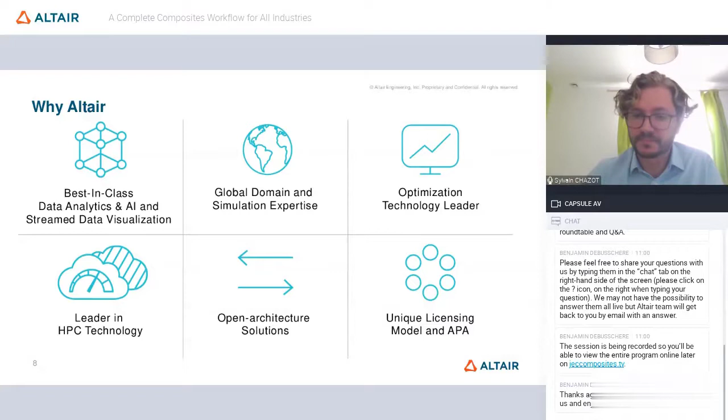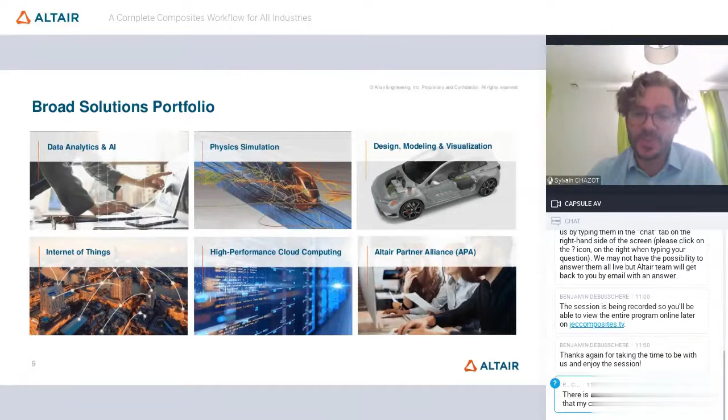Our solutions portfolio is broad and vast at the moment. We offer things from the Internet of Things to data analytics, to design and visualization. Today we will focus on physics simulation dedicated for composite analysis. For this, we cover a broad range of composite solutions, from advanced material modeling to composite design certification. We offer a full solution, and that will be detailed during the presentation of our VP just after my talk, to show you how we can help you be more efficient in composite design and composite simulation.

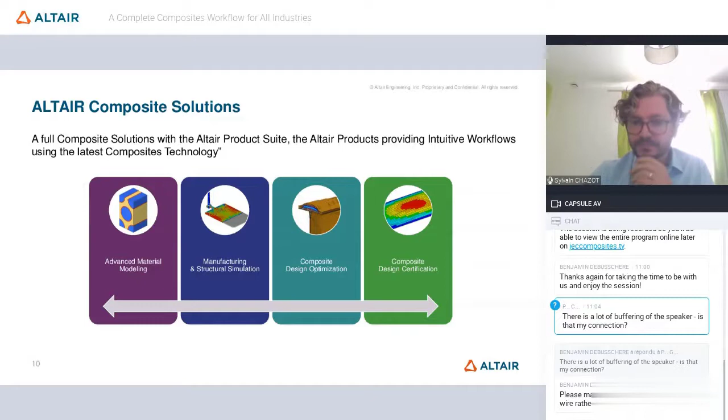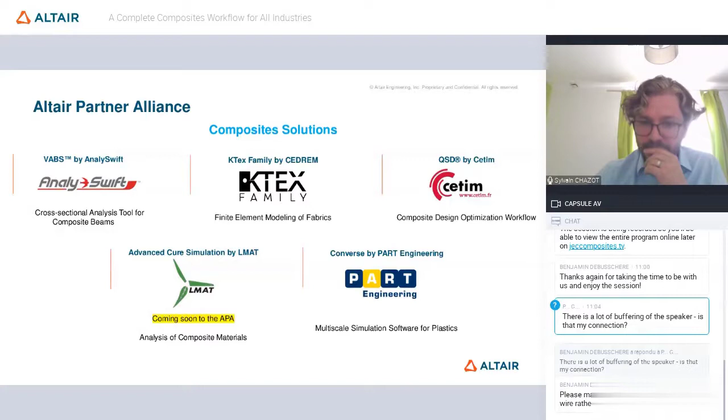Jeff Wollschlager has a Bachelor of Science in Civil Engineering with a specialization in structures from Purdue University. He then received his Master of Science in Mechanical Engineering from Washington University in 2002. He worked for Boeing doing research specific to composite activities, and he joined Altair in 2005. Now Jeff is currently our VP of Composite Technology at Altair Engineering, helping industry customers implement multi-scale material modeling, design optimization, and design certification technology into current and future composite design projects. Jeff is also an affiliate associate professor at the University of Washington, teaching composite design and additive manufacturing. So please welcome Jeff and enjoy the presentation.

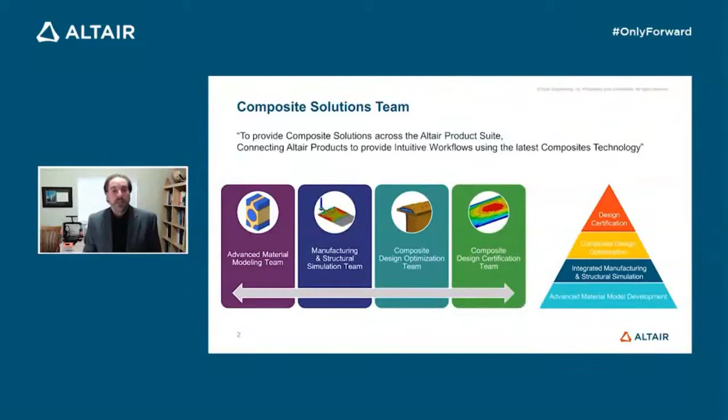So let's talk a little bit about each of these blocks in slightly more detail. In the advanced material model development block, it's really all about transitioning from a homogeneous isotropic world to a heterogeneous anisotropic world, and becoming as comfortable with heterogeneous anisotropic material models as we are with homogeneous isotropic material models. We're focusing on three main product forms right now.

In the continuous reinforced product world, mostly on unidirectional and woven product forms. Within those two product forms, the unique capability is the ability to bridge the scales from the homogeneous ply level to the constituent fiber and matrix level, and to do that computationally efficiently, obtaining results at the constituent fiber and matrix level such that we can get significantly more accurate material models.

Same thing in the discontinuous reinforced product world, which focuses on the reinforced injection molded material world, where we're describing the heterogeneous anisotropic nature of these materials, characterizing that nature, and accurately and computationally efficiently developing material models to describe all of that for you.

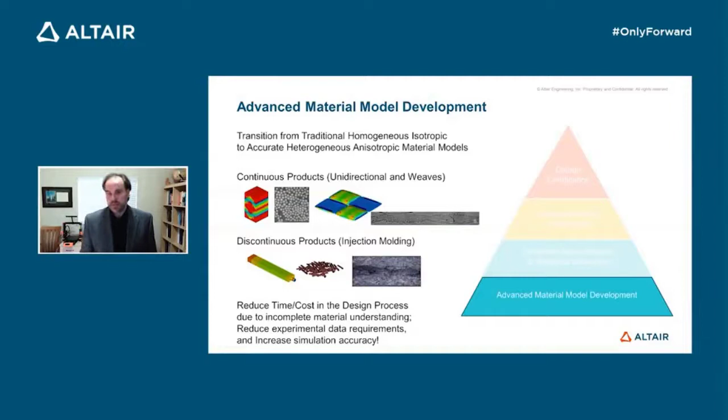The principal product we're using inside the advanced material model development block is what we call Altair Multiscale Designer. What's really unique about this product is that it allows the exact same material models to be used within all commercial solvers, implicit and explicit solvers included. And of course, it's very tightly integrated into our own solvers, OptiStruct and Radioss.

But the exact same material models are also available in other commercially available commercial solvers out there. It is indeed exactly the same material model and exactly the same code. We are using that through the user material capabilities of all of the codes, which is quite a nice thing to be able to do.

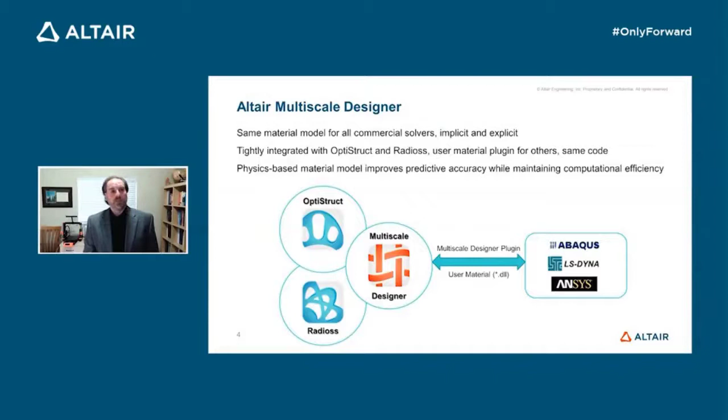When we're talking about integrated manufacturing and structural simulation, again, it's all about being able to efficiently build these structural simulation models while we're bringing information from the manufacturing simulation into that structural simulation in order to improve our predictive accuracy of these structural simulation models.

Three main areas that we're focused on. In the area of traditional or automated layup and infusion methods, we're working on integrating draping simulations for obtaining fiber orientations and/or residuals into the structural simulation very quickly and efficiently.

In the injection molding world, mostly the reinforced injection molding world, but also unreinforced injection molding, we're working on bringing the fiber orientations and the residuals, whether that be thermal gradients, and even using those thermal gradients to understand warpage and residual stresses and strains into the structural simulation world.

So that we can improve the accuracy of those structural simulation models. And the third area we're working on is filament winding, quite a bit of composite pressure vessels, or CPVs, where we're using filament or winding simulation software, which again is providing us fiber orientations and/or residuals of various natures that we can bring into the structural simulation world and apply those to improve the accuracy of those structural simulation models.

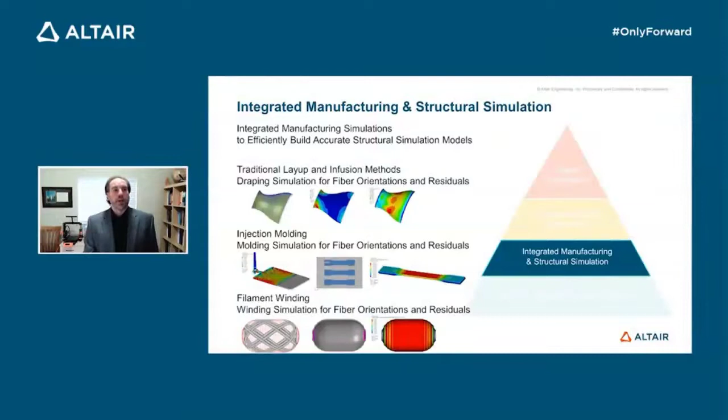While we're improving the accuracy, we want to be able to do that efficiently. You're going to notice that quite a bit of what we do is about efficiency and doing things as quickly as possible. A good example of a complete workflow in the integrated manufacturing and structural simulation world is the Altair injection molding solution workflow.

It involves three main pieces. We have just released Inspire Mold, which is a fantastic molding simulation product. It allows you to do your fill, your pack, and your cool simulations. In addition to all that, you can get your fiber orientations after you do a filling simulation.

Multiscale Designer is used in concert with the molding simulation to develop a heterogeneous anisotropic material model for that particular reinforced injection molded material. And then we bring both of those informations together into the pre and post processing world, which is HyperMesh and HyperView.

HyperMesh, where we build the structural simulation model. HyperView, where we're post processing that particular structural simulation model. And of course, we're using OptiStruct in order to perform the solution, whether it's a solution of a warping simulation or whether it's a strength simulation, including warp residuals in that strength simulation for ultimate load carrying capability.

So it is quite an advanced, wholly contained solution. I think what's really unique about this particular solution workflow is that it's wholly contained from all the way from the beginning to the end within the Altair product suite. Really solving the interoperability problem that you might have to go through if you were going to a la carte the pieces of this together from other commercially available offerings.

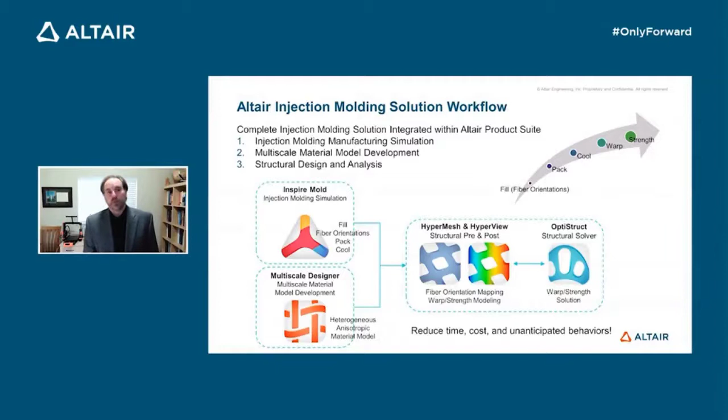Okay, going into composite design optimization. Using traditional capabilities in the concept design optimization world, namely topology optimization, which is going to give us, in the composite design optimization world, our part shape. We're using that exact same technology to really tell us what should the part shape be.

But we need to go a little further with composites. So once we know that we have a certain part shape, we can make up that part shape with any number of composite plies and any number of orientations and thicknesses that we need. And so we've extended our optimization capabilities into two primary technologies.

The first one in the composite concept design optimization world, which is called composite free size optimization. That technology is really focused on trying to describe what are the most efficient ply shapes. You're going to see here I have a slide that shows that we're actually synthesizing, just like topology is synthesizing a structure, we're actually synthesizing ply shapes that make up that structure with that particular concept design optimization technology.

Once you've kind of interpreted your concepts, then we can get into the detailed composite design optimization phase. And there we're talking about a technology called composite size and shape optimization. It's equivalent to the size and shape optimization. We just put the word composite on front because we're talking about sizing ply shapes now.

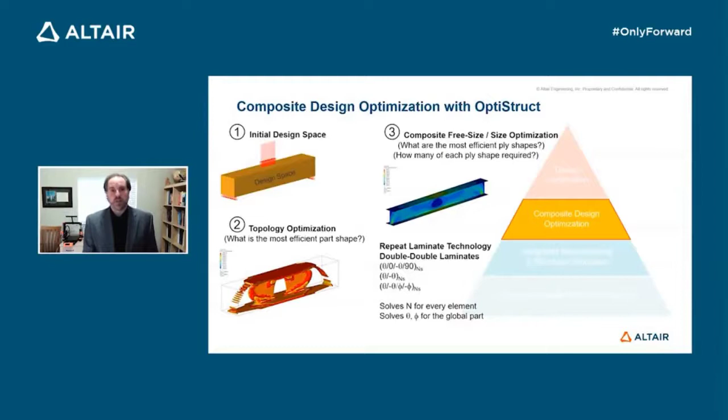Hopefully I can show you the image here where the real difference, the unique aspect of these composite design and optimization technologies we're bringing to the commercial world, is the ability to synthesize ply shapes you might not have intuitively thought to make before, but which are absolutely valid and can be made. You can see some examples here that might not be super intuitive, but are reasonable and practical to manufacture.

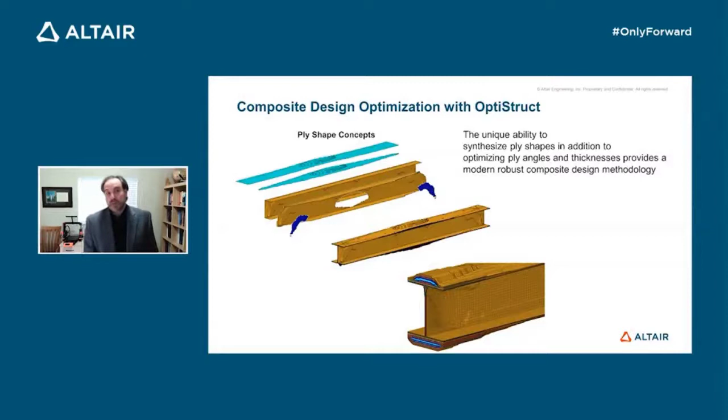So while we're synthesizing these ply shapes, we're also optimizing the ply angles and the ply thicknesses. We're providing a modern, robust composite design methodology that is quite different from traditional design methodologies in the world of composites.

Last but not least, in our development block of design certification, it's all about integrating composite stress toolboxes into a finite element architecture world. That's always been the outstanding item of these stress toolboxes, which exist in numbers across many companies—really interoperating with the finite element architecture or information. We have a unique opportunity at Altair since we acquired ESAComp, a fantastic composite stress toolbox that came out of ESA in Europe, the European Space Agency.

What we're working on is providing an integrated version of that technology inside the HyperWorks framework, really solving the interoperability problem—the exchanging of information between your finite element models and your traditional composite sizing or certification calculations—in order to reduce the pain point there. So that's all about the FEA Integrated Stress Toolbox.

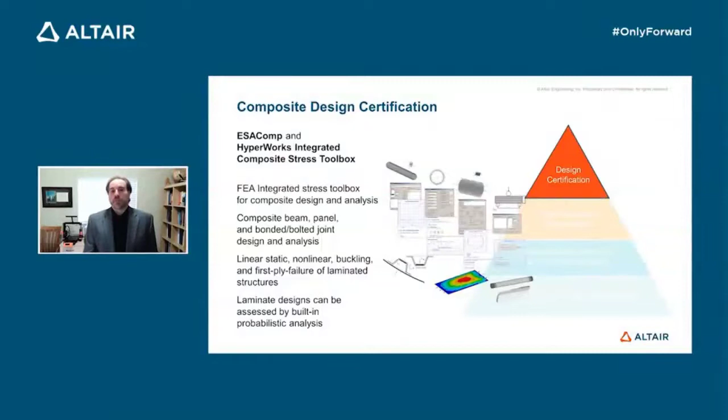It will provide capabilities for composite beams, panels, bonded and bolted joints, for both design and analysis. It can handle linear static, nonlinear, buckling, first ply failure, and even progressive failure of laminated structures. It's quite exciting to see this technology come in.

By and large, those are the four main areas we're focused on in development. Hopefully this gives you some insight into the vision and the roadmap and where we're going. The team was put together about a year and a half ago, and you should start seeing the fruits of our labor coming in with version 2020 and beyond. I hope you enjoy it.

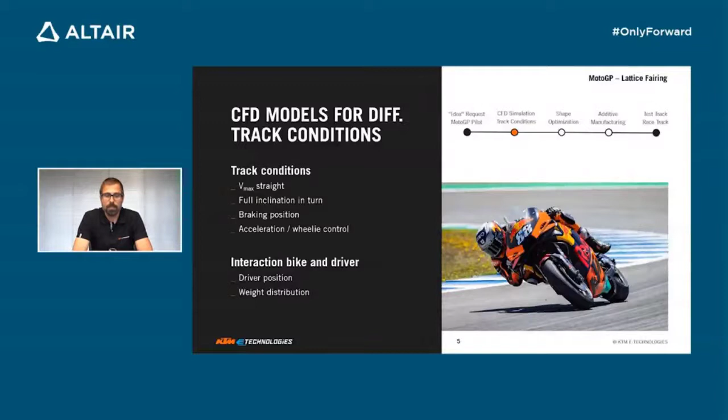We have to define whether it's a global problem, where the whole fairing has to be changed, or some kind of local problem where additional aerodynamic elements, for example the G-wing, is a possible solution.

We also have to define appropriate targets for our adjoint optimization. Either we want to maximize the downforce or minimize the drag, or whether we want to influence the flow around the driver or the force acting on the driver.

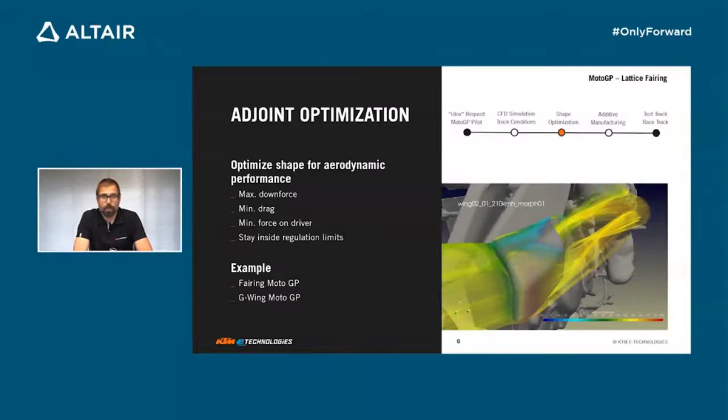In order to be quick on a test track, we need appropriate manufacturing techniques. We think that additive manufacturing in combination with simulation is a very good tool to do so.

Here we need especially simulation topics to define the back structure below our aerodynamic surfaces, to give the part enough stiffness that it will not deform during the ride.

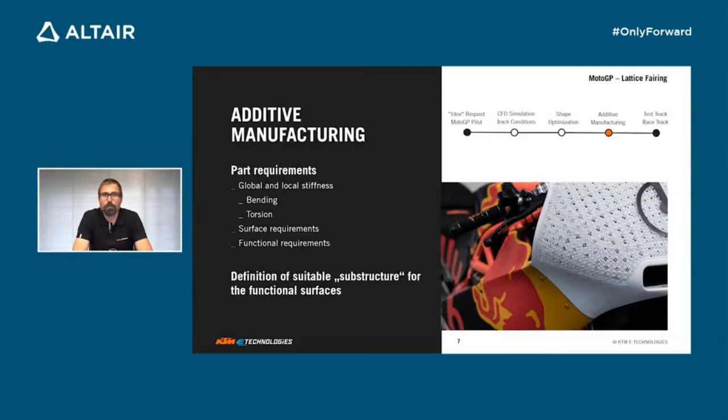As you can see on the slide, we developed lattice structures that differ in the lattice itself, the density of the mesh, and also the size of the structure.

To summarize this whole process, with the combination of Altair simulation tools and appropriate manufacturing techniques, we are able to really quickly get from an idea of improvement to a part that can be tested on the track.

We can tailor it to the needs of the driver, and we can even make different parts for every single driver without major additional effort.

Compared to conventional CFRP solutions, with this approach we do not need molds, and we also do not need the expensive CFRP material. So the whole process is not just faster than CFRP, but also a lot cheaper.

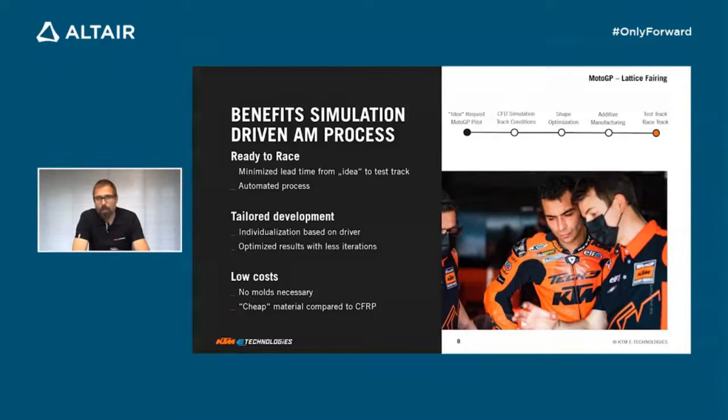The next case study I want to present is the development of a vehicle frame within a new urban concept. This new urban concept, or the platform, is called Emotion.

Emotion is a research project where the goal is to develop a cost-effective, energy-efficient and comfortable new light electric vehicle platform, especially tailored for young and older generations, where the platform provides the possibility to place vehicles in different categories, for example the L1 and L3 category.

We have three different areas of interest, where the first one focuses on lightweight frame design and packaging. This is what I also want to focus on in this speech. The other two are electric efficient powertrain and an innovative user-centered HMI.

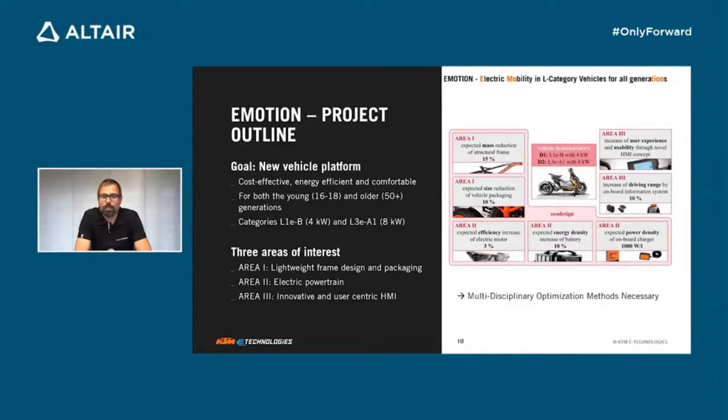For example, the mass is influenced by the battery size. The battery size influences the range. The structure is influenced, etc. Therefore, multidisciplinary optimization methods are necessary in order to find a global optimum.

To do so, we went through different steps. First of all, we wanted to get realistic load data for this new vehicle concept. Therefore, we set up a load data acquisition vehicle, which is somehow representative, by means of stiffness and weight, of the vehicle platform we want to develop.

We then equipped this vehicle or its components with measurement equipment, with strain gauges for example, calibrated on a test bench, and then went riding with it on a test track and also in real scenarios, as you can see on the slide.

We used simulation technique here mainly to define positions for the measurement sensors to be sensitive, for example, to a single force, so that we can divide the different forces in the right way, to then come out with load collectives that we can use for the further development of the bike and also for further test bench investigations.

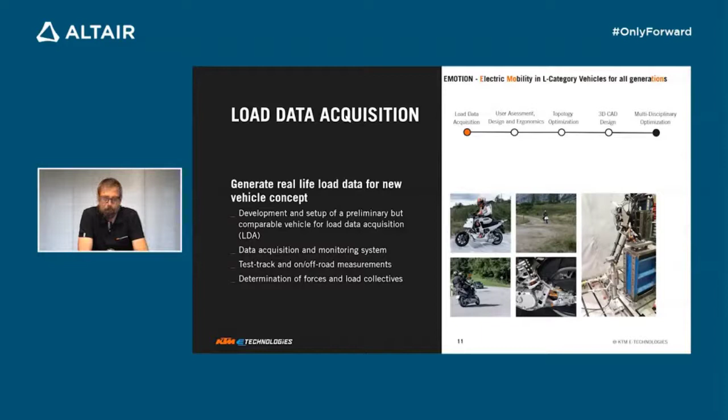In the next step, we try to include in our optimization some kind of implicit know-how, meaning we want to include the user at a very early stage in the development. We thought ergonomics was a very important input here, which is why we set up an ergonomic bike to collect impressions from users.

We combined this investigation with packaging studies to place the main components like the battery and motor, and also with first simulations regarding the topology of the frame in order to identify load paths.

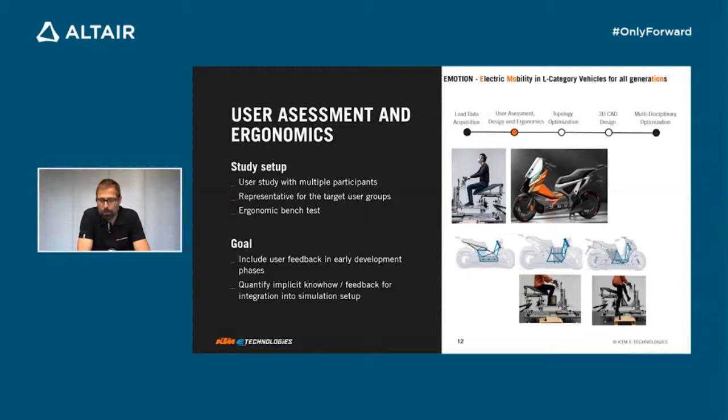And at the end, we tried to collect all input with some kind of parameters or formulas to be included in the optimization method.

On this slide you can see some results from the topology optimization. We used this simulation technique to play with different manufacturing techniques, masses, stiffnesses, materials, etc. There's a typical graphic coming out of it on top and on the bottom left side, which is a kind of density distribution.

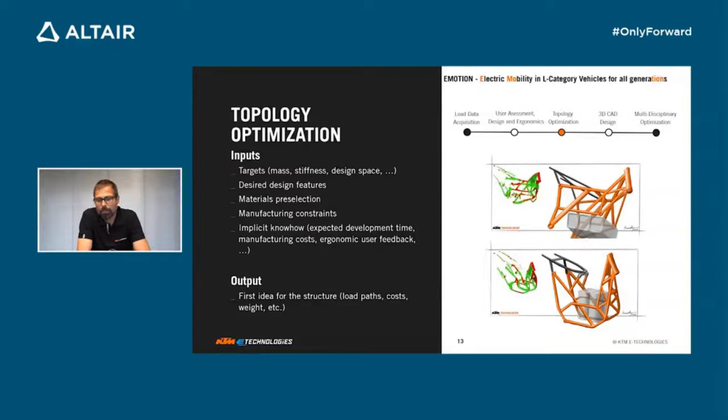We derived a technical sketch from this in order to interpret those solutions with a possible structure. You can also see different battery concepts that influence the structure here. So the main output is to get a first idea of how this looks.

In the next step, we set up step by step a 3D CAD model for the main structure, where we also used simulation techniques for the development and detailing of this structure.

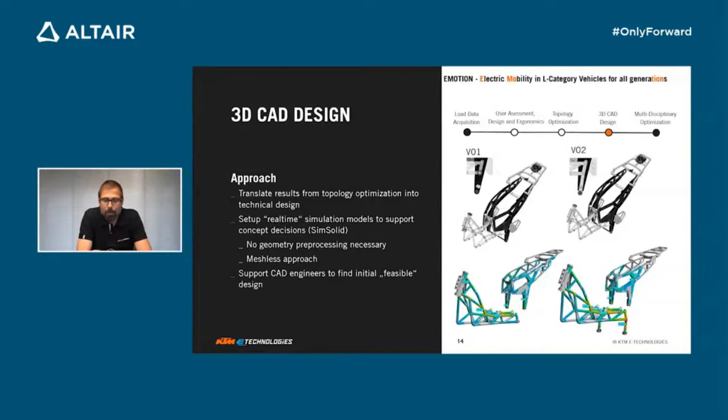We set up a SimSolid model, which is a meshless simulation technique that is more or less real time, so we were able to support the CAD engineers with important decisions. On the bottom you can see the final CAD, or the simulation of the final CAD, which is then the starting point.

For further optimization, this multidisciplinary optimization, we parameterized the structure - thicknesses, wall thicknesses, positions of the pipes, materials, etc. - and combined them with economical targets like costs and CO2 footprint to find a global optimum for our structure.

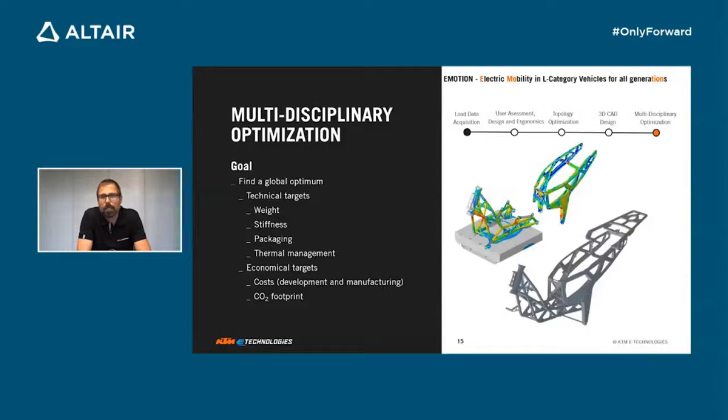The project Emotion is going on at the moment. The development is also ongoing, and the first prototypes will be set up by the end of this year.

The last thing I want to focus on is a series part that we try to rethink using simulation techniques - what we call a new generation footrest. We took a standard off-the-shelf KTM footrest from the KTM Super Duke 1290R. You can see the bike on top and the footrest and all its parts below.

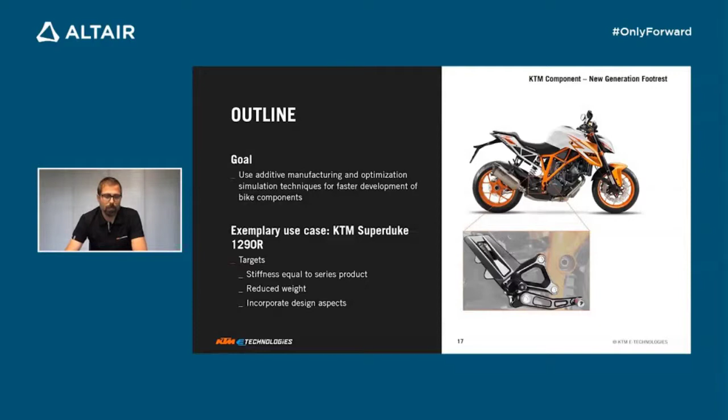We wanted to use simulation techniques to rethink this structure, where we want to keep the stiffness equivalent as it is right now, reduce weight, and also incorporate some new design aspects, or new design ideas.

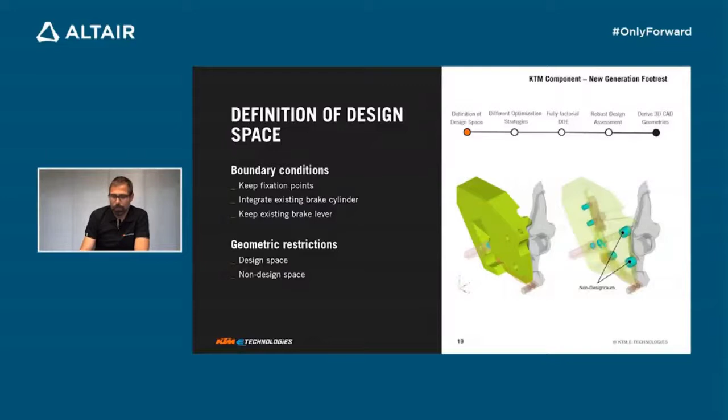In this case study, I want to focus more in depth on the simulation approach. You can see two different pictures here. On the left hand side you can see the design space we defined - we want to develop mainly the footrest main plate. On the right hand side you can see some non-design spaces where we want to keep the fixation points as they are, and also integrate the existing components into the optimization.

We went through 3 steps here, comparing three different complex optimization strategies. The first strategy is a standard optimization with nominal values, which results in a first design proposal. The next step includes scattering and defines a design of experiments, where we get different designs with scattered loads or scattered material parameters.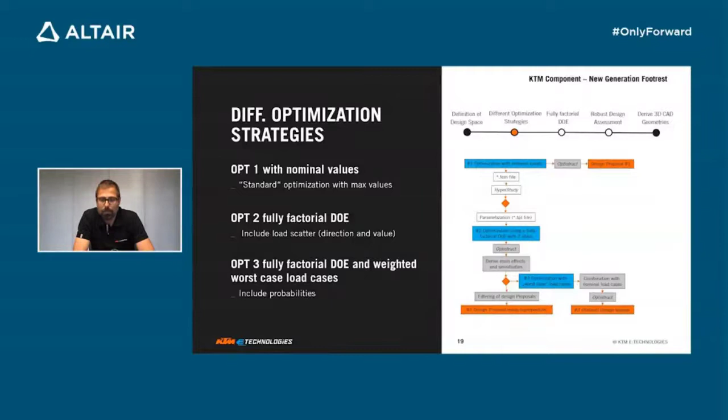We combined all this output to generate a second possible design. Then in the last step, we focused on the worst case load cases and also included probabilistic methods to finally come up with a robust design proposal.

In this slide you can see some results of the full factorial design of experiment. You can see on top that if we vary the force, materials, and other things, we come up with different load paths.

So there is a need to cluster those load paths, which we did here by using several colors. You can also see here on the bottom that we did some sensitivity analysis to define the important parameters, where lines showing a very horizontal line have no real influence on the properties of the part, and those with a steep or vertical line from minimum to maximum have a very intense influence on some property of the structure.

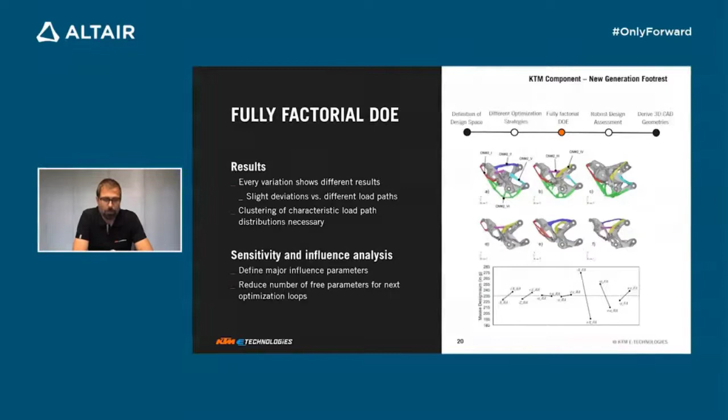Finally, here's an overview of the robust design assessment. You can see that although a footrest is a rather simple part, there is a lot of deviation in forces, for example from the position where the foot is set on. It depends on the shoe size, the driving condition, and the ability of the driver. So it's not that easy to reduce the load cases to a single force.

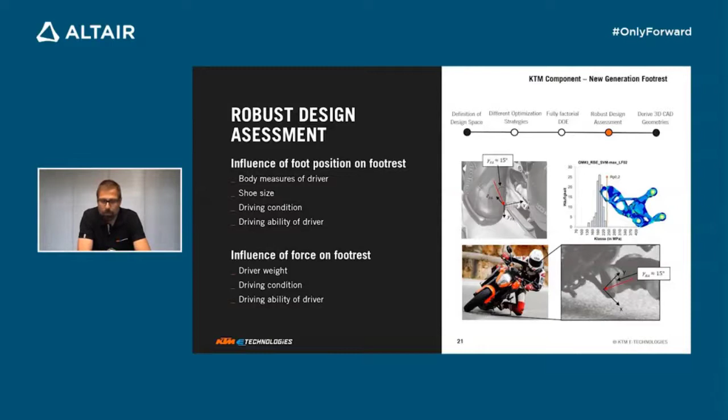So we included these different load positions, these different load directions, and combined it with probability. You can see on the top right an expression for this leading to the last optimization step to get a robust design. You can see the result on the top right hand side, where on the top left hand side there is the series part.

We now have two different ways of generating 3D data out of it. There is the direct 3D generation, where we can use surface data directly by post-processing in HyperMesh, or we can use faceted data, then go through a smoothing algorithm or geometric wrap to come to CAD data. Or we go an indirect way, exporting the faceted data into a CAD program like CATIA, and then set up a generic parametric CAD model, where we can simplify the structure and include other inputs.

On the top picture on the right side, and the bottom picture on the right side, there is an interpretation from our design company Kiska based on the results of the topology optimization.

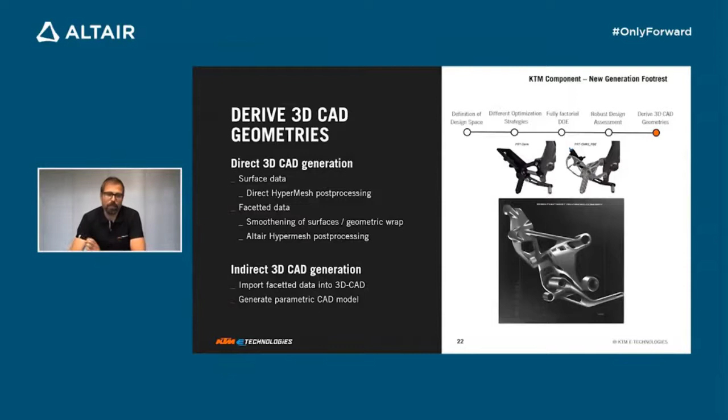To conclude my talk, I hope I gave you a short insight into different simulation topics and different ways we're using the Altair simulation portfolio. For us at KTM Technologies, it's very important to have fast and reliable simulation processes, and we try to use them at a very early stage in development to overcome uncertainties and already use facts for the decision of the way forward. What we also include very early is not only technical issues, but also costs, engineering complexity, and implicit user know-how.

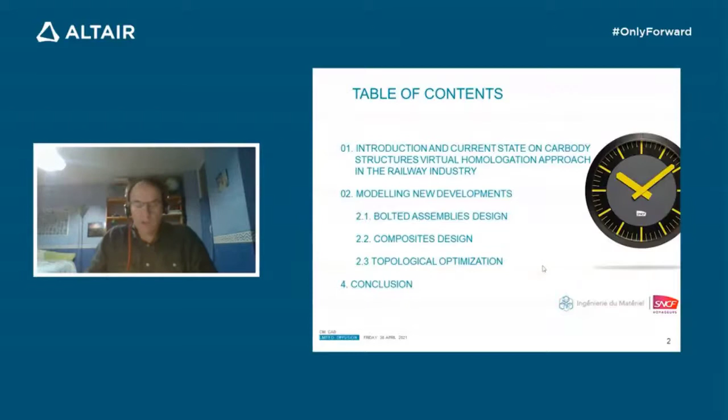We work in the engineering center of the rolling stock of the SNCF. We are in charge of the acquisition and modification of French trains. This takes us to often use numerical simulation, as it can be applied for maintenance support and for actions in research projects, European and national.

For the static, fatigue, and passive safety analysis, we have a good experience and proven methods with the use of European standards: EN 12663 for static and fatigue, and EN 15227 for passive safety.

In our static and fatigue analysis, we start from a CAD model using CATIA software. After, we prepare our simulation model under Hypermesh and calculate the reference loading cases. We have recently changed over from ANSYS to OptiStruct software in order to simplify and optimize our licenses and to limit the tools within the HyperWorks environment.

Using test calibration to validate our numerical model is really essential.

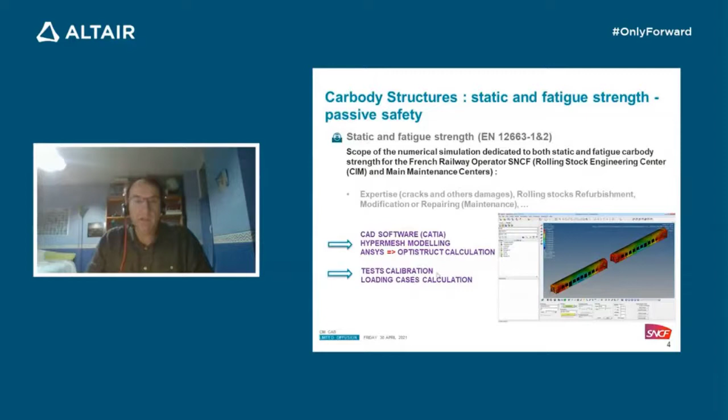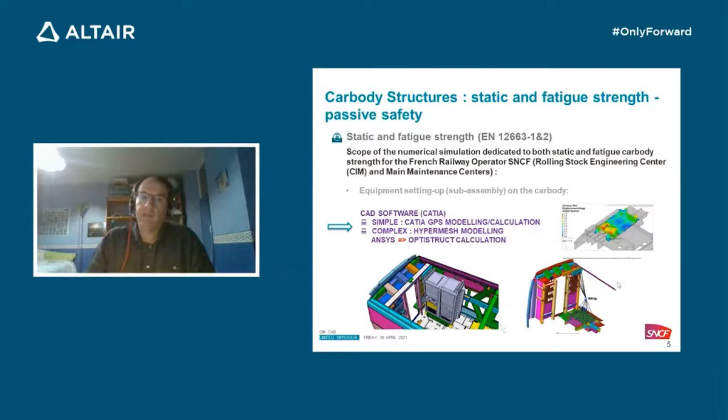For equipment setting up on the car body, we have the possibility to apply the CATIA modules for a simple approach. But when the modeling is too complex, the action is the same as for the car body structures. On the figures, you can see the establishment of a technical rack in a TGV power car, with the simplified model for the rack and the calculation of the support and fixings.

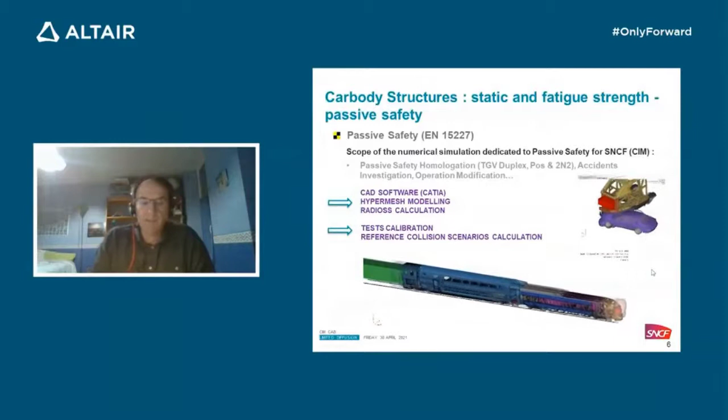For passive safety, we apply Radioss software since the 90s, with a proven combined method using tests, calibration of the tests, and numerical simulation of the reference scenarios. This method is well described in the 15227 standard.

We have specific applications like animal impact studies with severe consequences on our trains, and the need to protect our antenna and other safety equipment. On the figures, you can see the protection of 4 braking systems.

Also, biomechanics is well developed in the automotive industry and in railway for the States or UK, for example. Further efforts need to be made to require biomechanical studies for new rolling stock, mainly for abdominal impacts, with the necessary development of adapted tools and criteria.

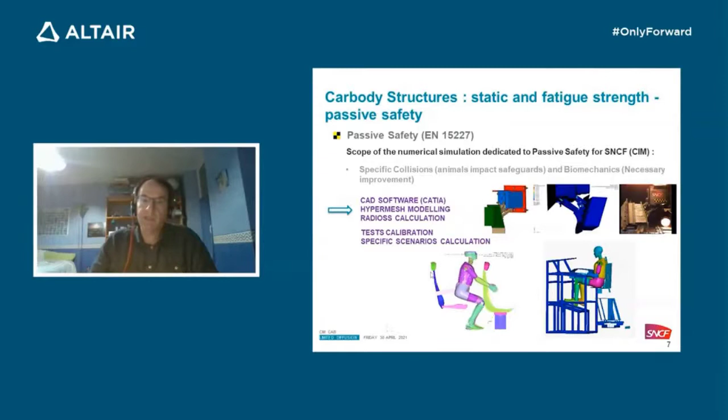Hi everyone, I will present to you the design of composite parts on use cases. The first challenge for the design of composite is to make consistency tests on calculations.

When it is done, we compare non-linear and linear calculation to know if linear calculation with OptiStruct is conservative or not. When we are confident with the calculations, it is possible to design or redesign composite, especially when you have negative feedback of composite behavior during commercial service and it is not possible to modify the part. We will see an example further.

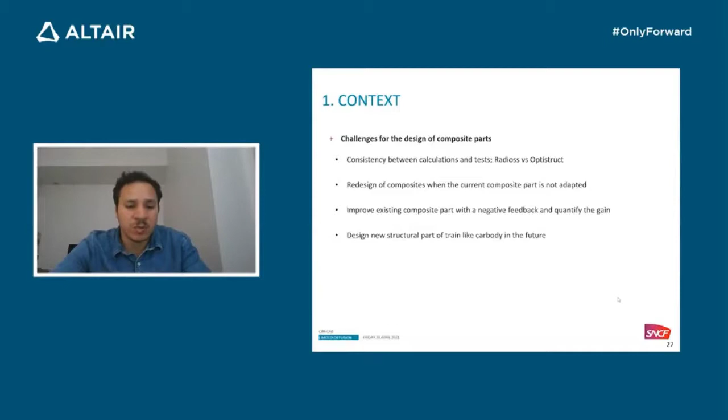Also, when there is negative feedback with the composite part, but it is possible to modify, it is necessary to design the modified part and quantify the gain associated. At the end, the design of structural composite parts allows us to control the work design done by train manufacturers and homologate new generations of trains with composite structural parts.

At the beginning, it is necessary to obtain some parameters of the composite, like Young's modulus in fiber direction and so on. We obtain it for polyester glass used on train fairing.

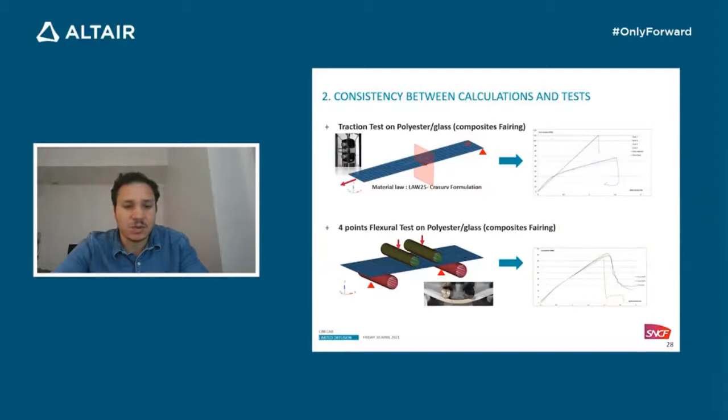One of the tests we wanted to correlate is the traction test. With that, it was possible to adjust non-linear parameters. The same was done with the 4-point flexural test.

Then we wanted to know if OptiStruct calculation gives conservative results compared to nonlinear calculation with Radioss. We also want calculation as quick as possible.

For that, we use a bogie hatch used in a peri-urban train, as we can see here. This localization is for the part close to the bogie. We put in the calculation 2000 Pascal pressure, the maximal pressure seen by this train.

It is put on the external surface, as we can see here, and we use material cards, two types of material cards for the ply, mat and taffeta. The composite is made of 2 point inserts and 1 lock point below.

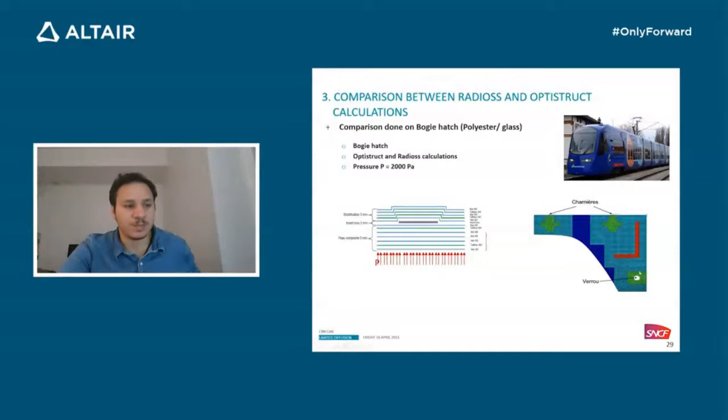The result of the comparison is shown in this slide. As we can see, concerning the displacement, it is different because of the decrease of mechanical characteristics with nonlinear behavior of the composite compared to the linear calculation with OptiStruct. It introduces more flexibility. However, concerning the Tsai-Wu index, the OptiStruct calculation is above the Tsai-Wu index of the Radioss calculation. We can conclude that using OptiStruct is okay and faster than Radioss.

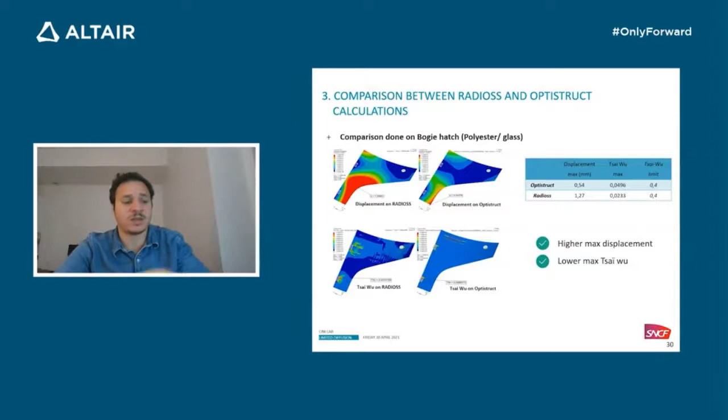Now I will show you a different example of negative feedback. For the suburban train from Siemens, we had some problems because the part was done by the pultrusion process.

As we can see, the hatch is maintained by composite slide in red, but some cracks appeared, as we can see here. The pultrusion process with only one fiber direction is not adapted to the direction of the solicitation.

Another example with negative feedback is air conditioning hatches, as we can see here. We had some unwanted hatch opening during commercial service. There is too much flexibility and not enough quantification of effort in the insert.

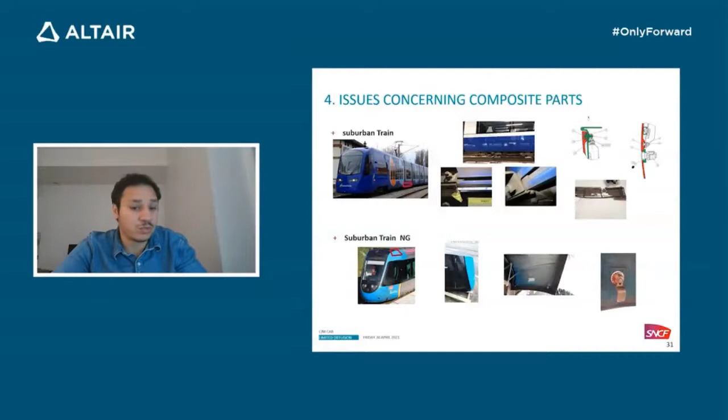We will see the necessity to modify the air conditioning hatches and estimate again further. As we are confident with the parameters, it is easily possible to design composite on suburban train next new generation, for example. We modify it by introducing foam in this place to improve the stiffness of the hatches.

We add also over-lamination on the foam on the insert in yellow. The aim was to reduce the displacement when the part is under aerodynamic pressure, also reduce the Tsai-Wu index, and at the end estimate the traction and shear force on the insert not done by manufacturers. At the end, all is okay: displacement, Tsai-Wu index and force.

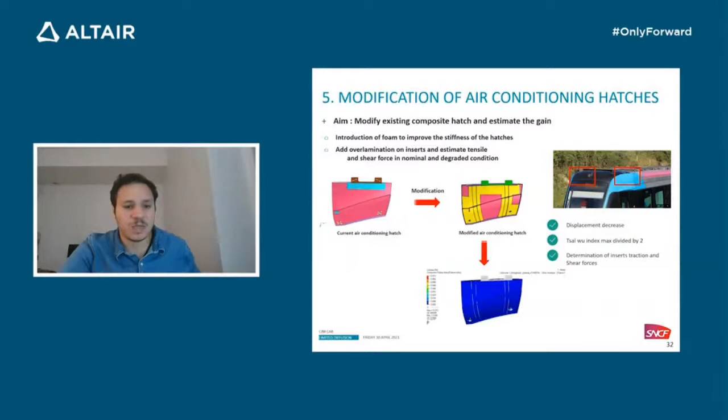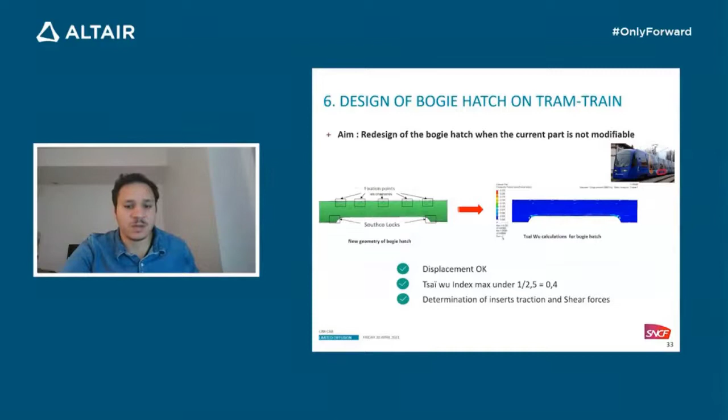For another suburban train, as we can see here, it was necessary to redesign all the parts. So we decided to create new geometry, a new insert, and estimate Tsai-Wu index force in the insert. Everything is okay. Also, for the structural part, we participate in the Shift2Rail pivot project, which consists in developing the conceptual

detail design of the different demonstrators, to be performed together with all the related manufacturer activities needed to build the physical specimen. For us, design composite permits to know the necessary and sufficient elements to homologate structural composite parts in a train in the future, to be able to maintain a composite structure during its entire life.

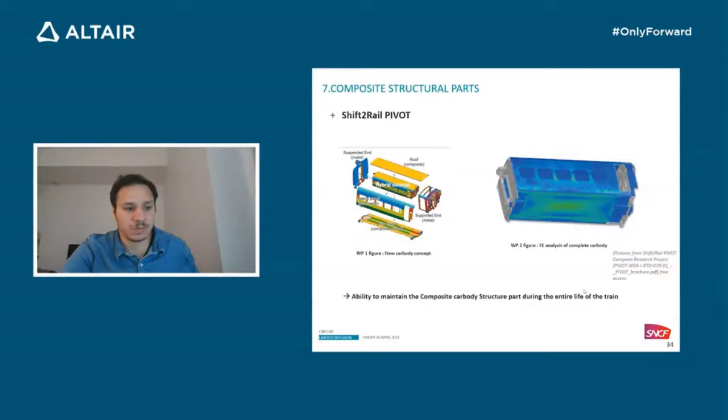Thank you. I would like to shift focus now to the topological optimization that is fundamental today for new design. Indeed, we apply topological optimization for mass reduction that is essential for the reduction of the energy consumption for the required limited mass. We use also this tool for new manufacturing applications like 3D additive printing.

The figure, resulting from a European research project, shows the methodology to optimize door and windows with the necessary reinforcement location. You can see the X shape for reinforcement elements. For the static and fatigue approach, we use CATIA software for the CAD model, then HyperMesh to prepare the model, and OptiStruct for calculation.

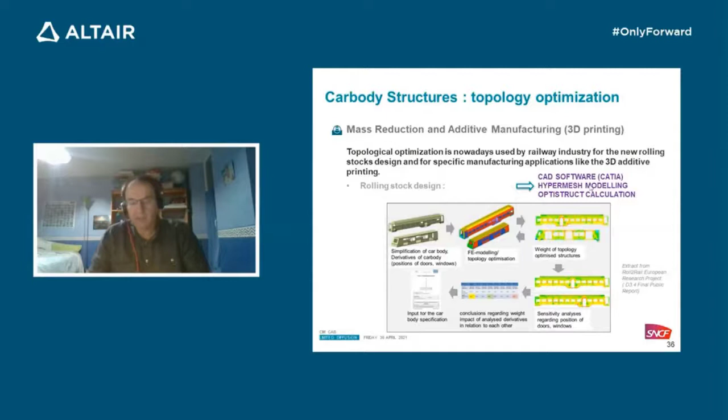The topological optimization is particularly well adapted to the composite structures, with the well-known sentence: the right material in the right location.

If you look up at the screen, you can see the distribution of the necessary fiber orientation along the car body structures. You could see where longitudinal fiber are necessary, vertical, transversal, and diagonal direction, but also when a classic isotropic material is more appropriate, like with the blue color.

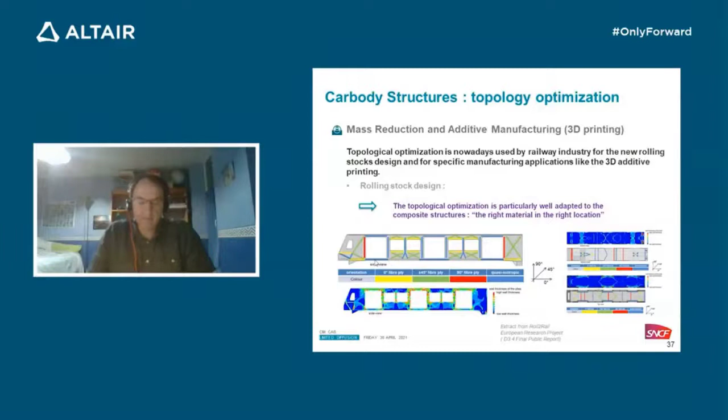On this slide, you can see an example of topological optimization study. This study is about the cracks of wagon tension carrier rails. The figure shows the initial volume for optimization, the optimized shape, and the corresponding calculation with the possible manufacturing elements.

Here, a simple welded plate. This specific shape could be manufactured with 3D additive printing.

We cannot show last elements manufactured with 3D additive printing for existing trains and the future rolling stock, but structural elements were tested in laboratory and are tested now in operation on our trains. This new method allows the use of more expensive, stronger materials than the classic ones, thanks to the base material reduction.

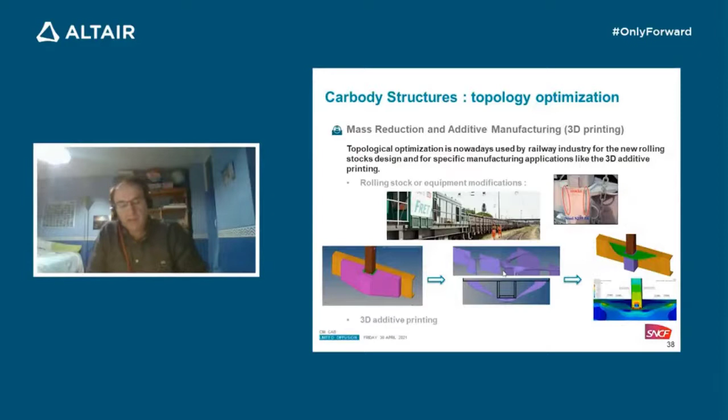As conclusion, virtual homologation is now broadly applied and mastered for the car body structure design in the railway domain, for the static, fatigue, and passive safety analysis using the HyperWorks tools. Nevertheless, improvements are necessary for bolted assembly design, composite designs, and also biomechanical studies.

For the future, it will be necessary to master the topological optimization and to combine numerically the track and rolling stock interaction. Thank you for your attention.

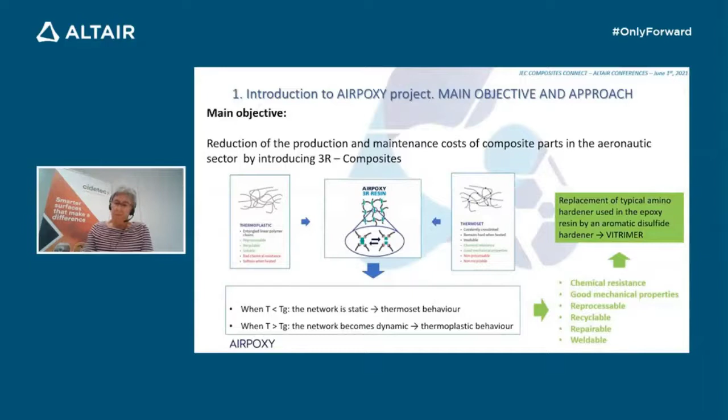Regarding the objectives, the project focuses mainly on 4 specific objectives. First, the development of a 3R resin that meets the requirements of the aeronautical sector.

Second, the development of a 3R thermoforming process based on the 3R resin that allows high volume production processes faster and cheaper than the autoclave. Third, the development of a 3R repair process that, combined with structural health monitoring technologies, allows early detection of delaminations or debonds that can be repaired by easy and fast repair methods.

And fourth, the development of two 3R bonding processes: one based on the welding of two 3R substrates that will be faster than conventional bonding processes, and one based on the conventional bonding process, using a 3R adhesive that allows increasing the bond line robustness when bonding 3R substrates.

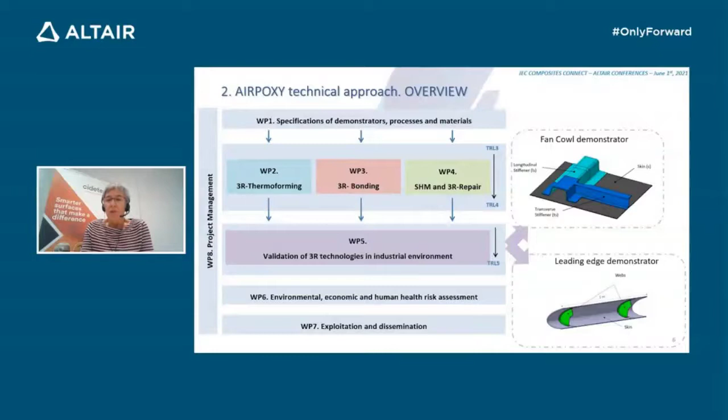All the technologies are supported by simulation methodologies that are being adapted to the 3R concepts. So, in the project, several materials and processes have been developed, which are summarized in this table.

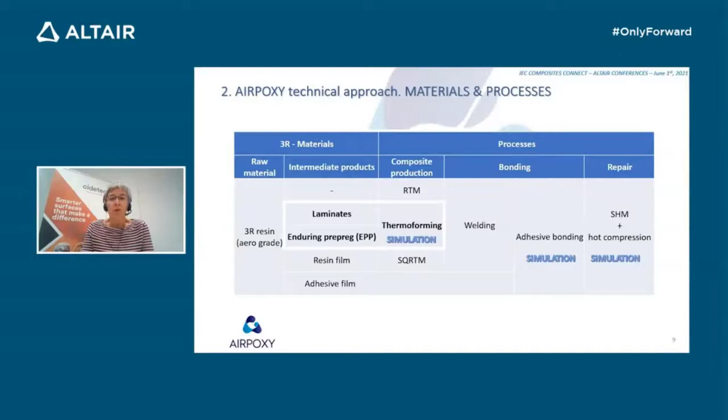Simulation activities have been performed on thermoforming, adhesive bonding, and repair technologies. Today, I will focus on the simulation performed on thermoforming of laminates and out-of-autoclave prepregs produced within the 3R resin. The 3R resin was formulated, with properties comparable to the properties of the traditional epoxy resins used for aeronautics.

The characteristics of this resin that we have formulated, in terms of viscosity and curing cycle, were adjusted in order to be suitable for infusion and/or resin transfer molding processes, directly to produce the final parts, or to produce intermediate laminates that later will be used for thermoforming. The resin can be prepared and supplied in monocomponent or two-component version.

Once confirmed the thermoformability of the resin, fully cured 3R laminates were produced using the resin transfer molding process. On the other hand, out-of-autoclave prepreg was also produced. This prepreg is stopped at the gel point of the resin, which means that the prepreg can be stored at room temperature.

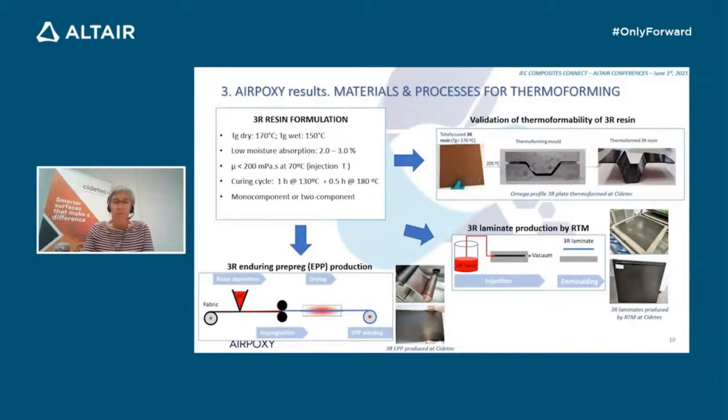Once the materials were produced, the next step was to study different thermoforming strategies to be approached with the laminates and out-of-autoclave prepregs produced with the 3R resin. For that, 3 different strategies were defined.

The first strategy consists of thermoforming the fully cured 3R laminates in a discontinuous process, in a similar way to the thermoplastic organosheets. The second strategy consists of thermoforming a stack of out-of-autoclave prepreg in a discontinuous process. During this process, the plies are consolidated and thermoformed at the same time.

The third strategy consists of thermoforming the out-of-autoclave prepregs, but in this case, in a continuous process. In the first stage, the plies are pre-consolidated, and in the second stage they are thermoformed, with the process being continuous. This option is suitable for the production of geometries with symmetrical sections like omega profiles.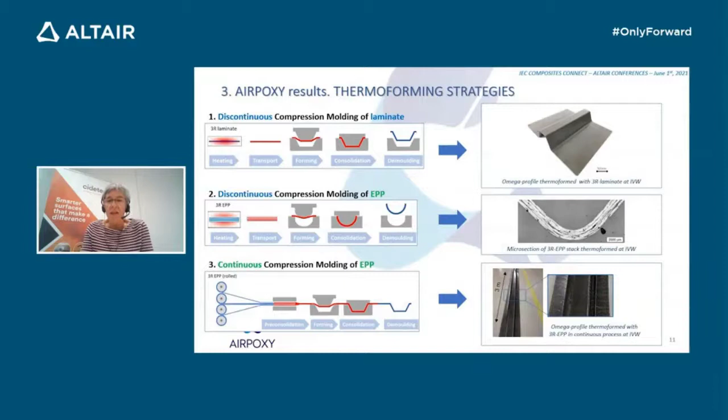The image shows the proof of concept obtained by IVW during the development of the 3 strategies. I must say that at this moment the 2 discontinuous processes are practically fixed, but in the case of the continuous process, it is being optimized.

In parallel, the thermoforming simulation tool was developed, and for that, 2 main research axes were developed. The first one is the ply-ply interaction modeling, which is a crucial tool to predict defects, because local wrinkle or delamination can be predicted only if the interface behavior is simulated.

It was proved that the cohesive element approach is able to capture the behavior of the 3R resin. For the second modeling, the 3R laminate behavior, a new material model was implemented that can capture the material anisotropy during the forming process, and can simulate the nonlinear elastic behavior of the fibers and the contribution of the isotropic resin.

For that, 2 different resin models were developed: one considering the resin as a viscoelastic material, and the other considering the resin as an elastoplastic material. In both cases, it was confirmed that the models can capture the material behavior at different temperatures and strain rates.

The material was calibrated using tensile, bending, and in-plane shear tests, and the models were tested on structural scale models such as semi-spherocylinder and hemispherical models that you can see in the pictures.

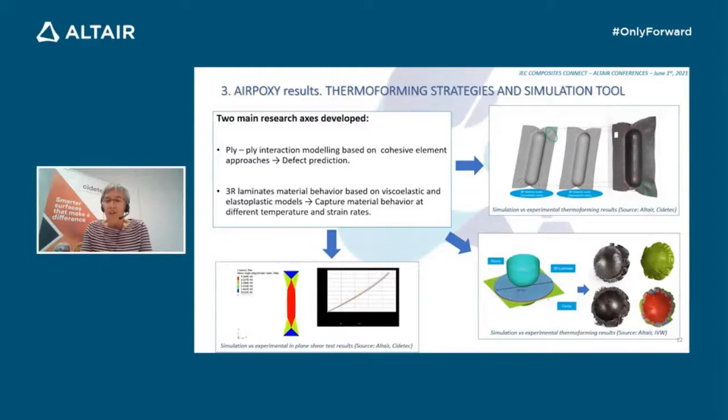Good agreement was obtained with real parts, and it was possible to predict with accuracy the final shape, type, and location of defects like wrinkles and delaminations.

Next, the models were adapted to simulate the 2 elements that will be produced by thermoforming: the longitudinal stiffener of the fan cowl demonstrator, and the webs of the leading edge demonstrator.

In the case of the webs, several material and process options were studied in order to define the parameters that better avoid wrinkles and delaminations.

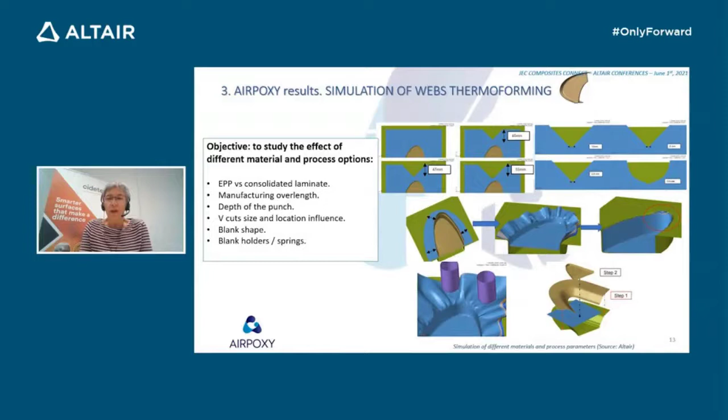In the case of the longitudinal stiffener, it was designed with an omega shape in order to increase the torsional stiffness of the structure. A small pan-down was included, and the head was reinforced in order to carry the main tension and compression loads. Both geometries are usual in this type of stiffener.

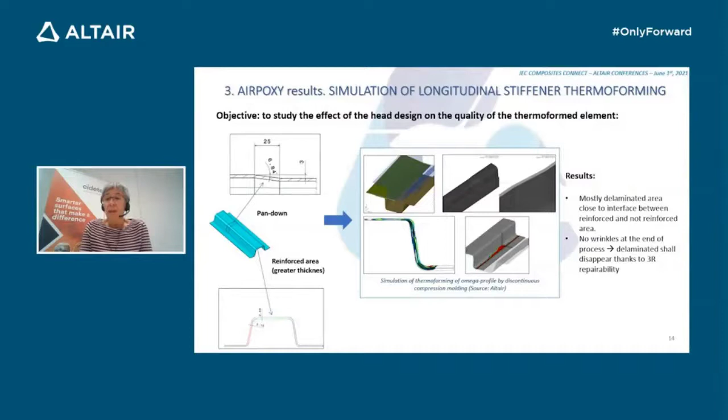The simulation tool was used to study the influence of the pan down and variable thickness on the quality of the thermoform longitudinal stiffener. It was observed that mostly the delaminated areas appear close to the interface between reinforced and non-reinforced areas, but no wrinkles are expected at the end of the process, as the delamination shall disappear thanks to the repair capability of the 3R resin.

Finally, the conclusions. So far, we can conclude that two numerical tools have been developed for the thermoforming of 3R laminates: the ply-ply interaction modeling based on the cohesive element approach, and the 3R laminates material behavior based on viscoelastic and elastoplastic approaches. The models have been tested on structural scale models, and all of them show good agreement between numerical simulation and test results.

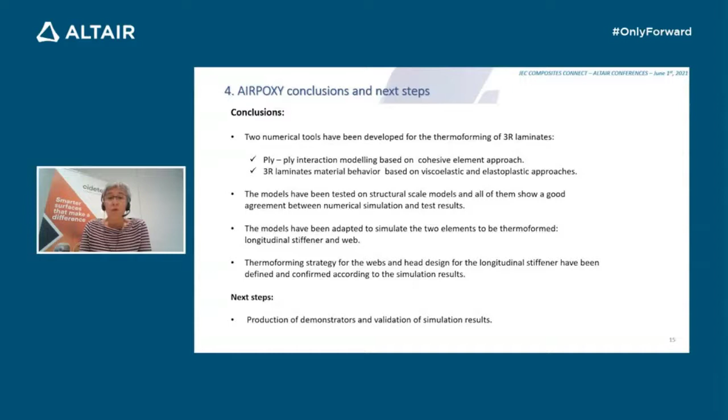The models have been adapted to simulate the two elements to be thermoformed, the longitudinal stiffener and the webs. Finally, a thermoforming strategy for the webs and head design for the longitudinal stiffener have been defined and confirmed according to the simulation results. The next steps are the production of demonstrators to validate the simulation results. At this moment, the molds are being produced, and we expect to have the first demonstrators produced by the end of this year. And this is all.